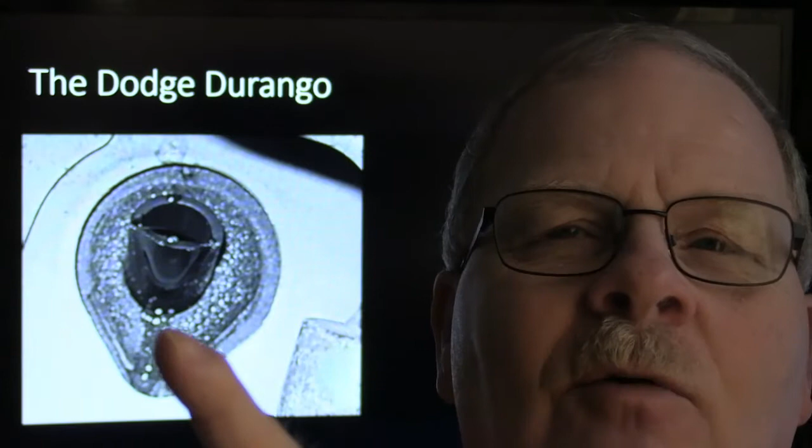But on this particular one, it was wet in the carpet. So what you do on this one is you smear a lot of silicone around here—I mean just a lot of it—and that enables it to drip and run back down that pipe, like a coffee cup. You know, when you pour your coffee, sometimes it drips.

Anyway, it was doing that, and we had seen this on a few of these Dodges. We saw it on a Caravan, we saw it on a Dodge Stratus if I remember right, and we saw it on several of them. The first one we saw it on, I think, was a Durango that belonged to one of the people who worked at the college.

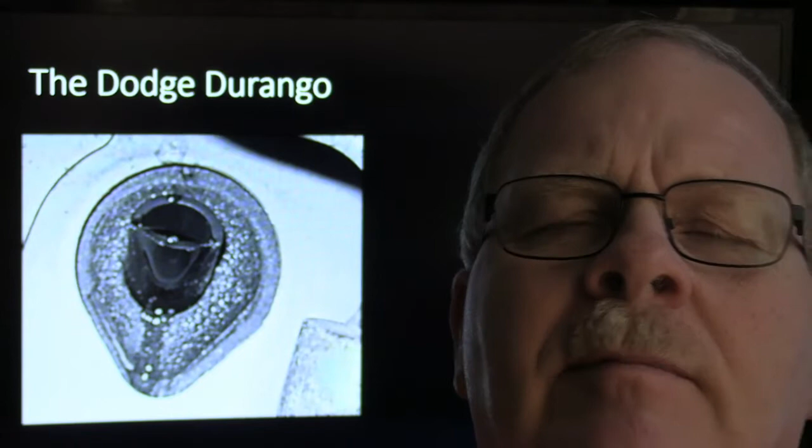This picture illustrates something almost everybody who's done serious vehicle work knows: if you put some dye in whatever's leaking, it'll help you find the leak. If you have a black light, they give you special yellow glasses, but you can actually go to Harbor Freight and buy a flashlight that's a black light. This one we'd use as fluorescent dye. You can buy a kit with the black light and all that stuff, and pay a good bit of money, but you don't have to. You can get a black light pretty cheap, like that small Harbor Freight flashlight. A lot of times you can even see the dye without the black light, but that's what we had here - it pinpointed an oil pressure sending unit that was leaking, and that's how we located it.

The students benefited greatly from that. I had also mentioned before that some people I've known would take Dr. Scholl's foot spray, that white powder, and spray everything underneath, then you'd see where the oil was coming from, because it's easy to spot when everything's painted white with that powder - the oil coming out is going to be easy to notice.

Here was an oil leak happening on a friend of mine's vehicle. He had a 2.2 liter Camry, and it was leaking from right around here. That little piece you're seeing is the oil pump, and there's an O-ring in there, sort of a triangular shape. Those O-rings on these Toyotas love to leak.

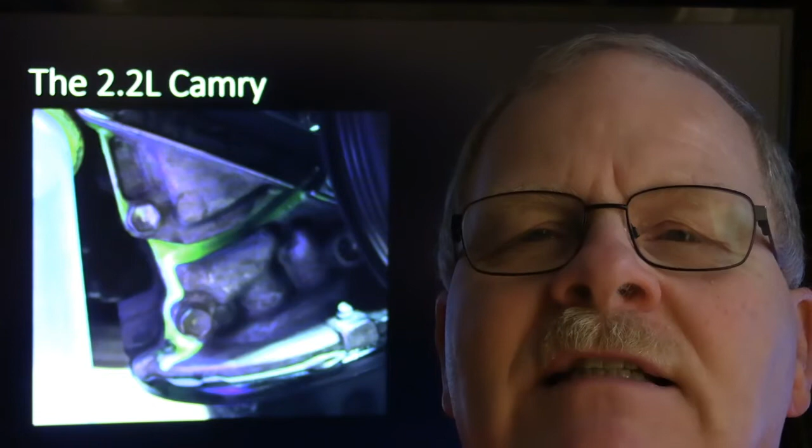That's what happened with my son. He was driving one of these vintage vehicles for a while, and he and his family drove it over here from Augusta. When they got here, you can see the pan gasket that was replaced by the shop right before he came. He had a pretty serious oil leak, so he took it in and they said, oh yeah, we've got to put a pan gasket on there. The shop charged him $400 to put a pan gasket on it.

As he drove over here, he noticed every 100 miles he'd have to stop and put a quart of oil in it. I don't remember if he thought to check it or realized it was leaking, but he had to stop and put oil in it - it was just pouring oil from under there, you could see it all over the place.

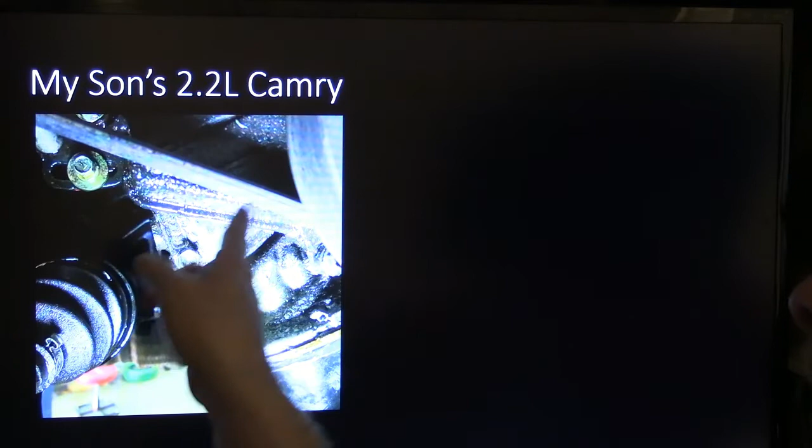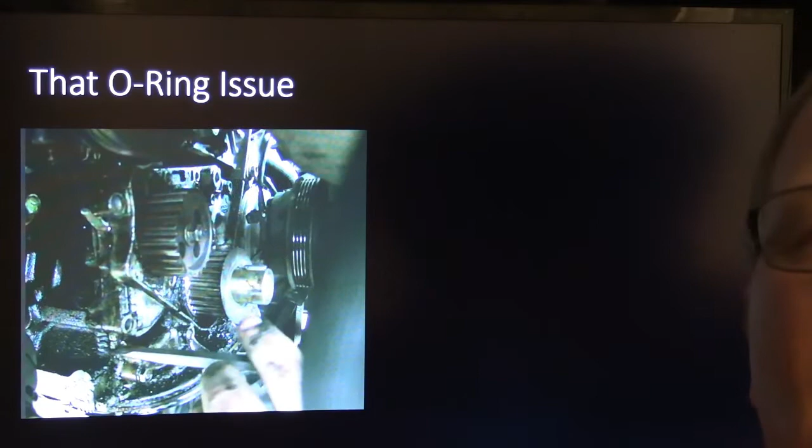This is the oil pump, the same one I showed you with the dye before, and they thought the leak was coming from here because it was running down and dripping off - that's where the pan gasket they put on there came from. There's a little video of us on that same job, that same vehicle, working the oil pump off. This sprocket drives the oil pump with a timing belt, and we'll get that off in just a minute if we keep watching.

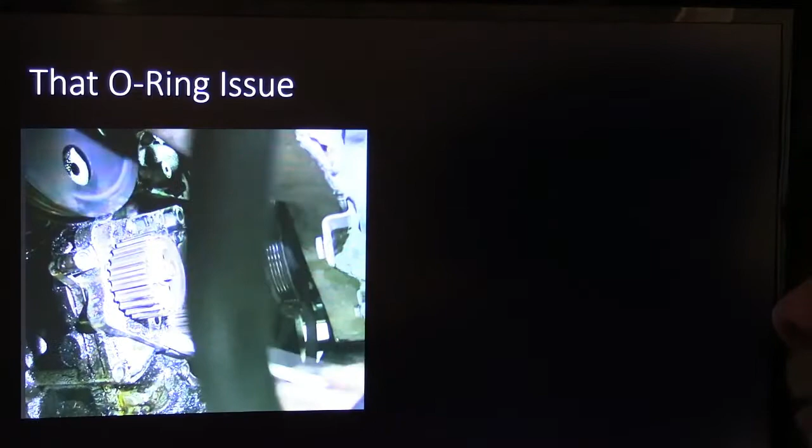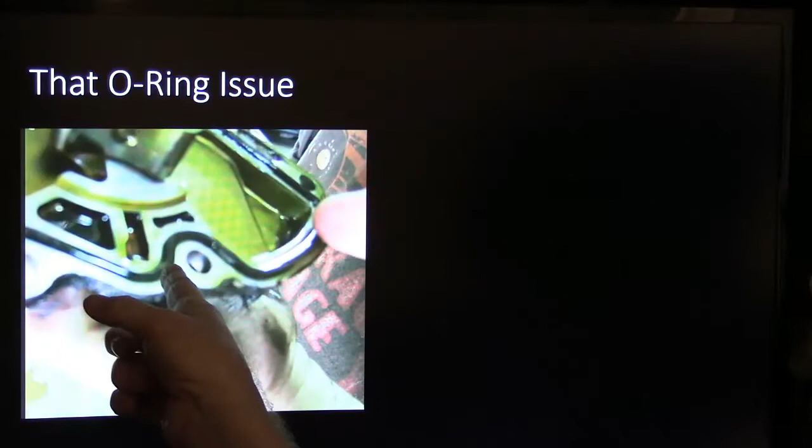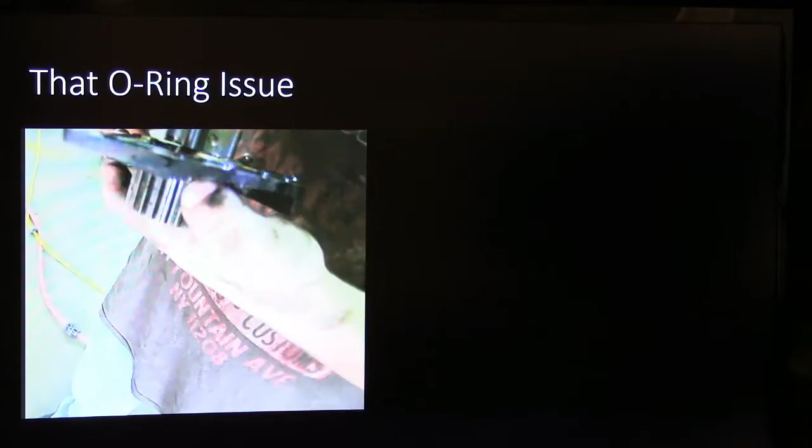And we get the oil pump off of there. There's a little O-ring that always gets really hard and leaks, and that's what was leaking on his. So we had to work that O-ring out of there and pop another one in. You can buy an oil pump O-ring for a Camry at the parts store. It ain't that hard to come up with one.

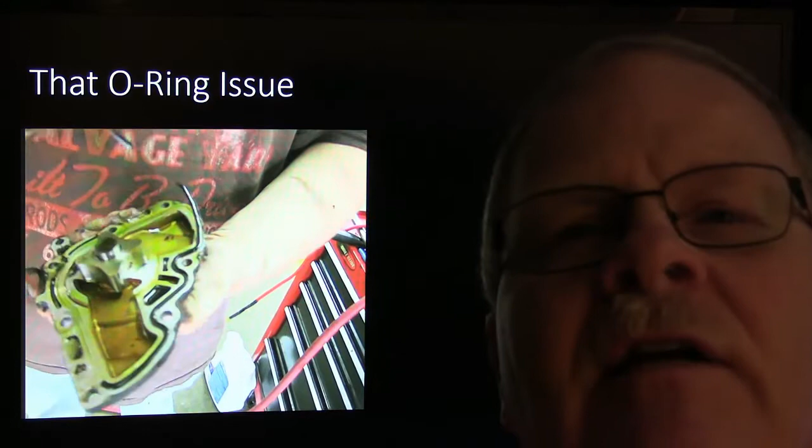But anyway, there it was. So long and short of it, that's not a very difficult job. Furthermore, the balancer on one of these 2.2s, you can just pull it off over your fingers once you pull the balancer bolt out. So anyway, there's enough of that.

And he moved it closer and closer to the door and kept lowering the price, I think hoping somebody would steal it. But I saw it laying over there, and he had like a $500 price tag on it. Nobody knew what to do with that, because it was a scope, and if it had been a scan tool, somebody probably would have bought it right offhand. But I said, I'll buy that scope from you for $300. He conferred with his boss man, came back and said, $300 it is, plus tax. So I paid him $300 on the spot and walked out of there with that scope and used it for a long time.

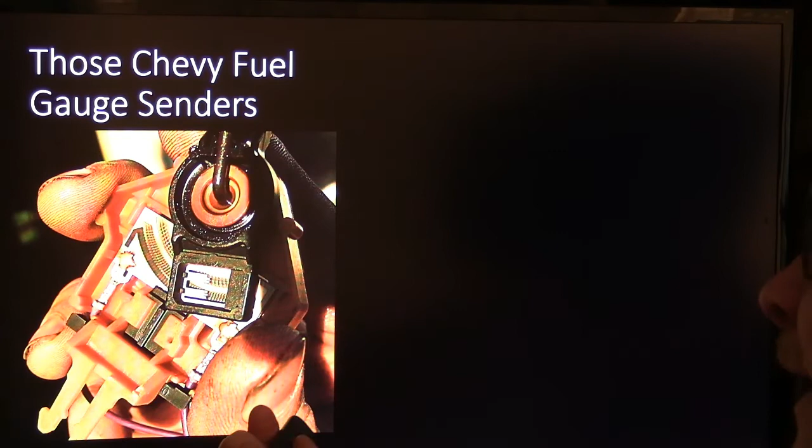If you're going to take a picture of something like this, by the way, it's really important to go ahead and hold it in the sunlight.

Sunlight's about the best light you can get on some subject matter like this. And I took that picture a pretty good while ago.

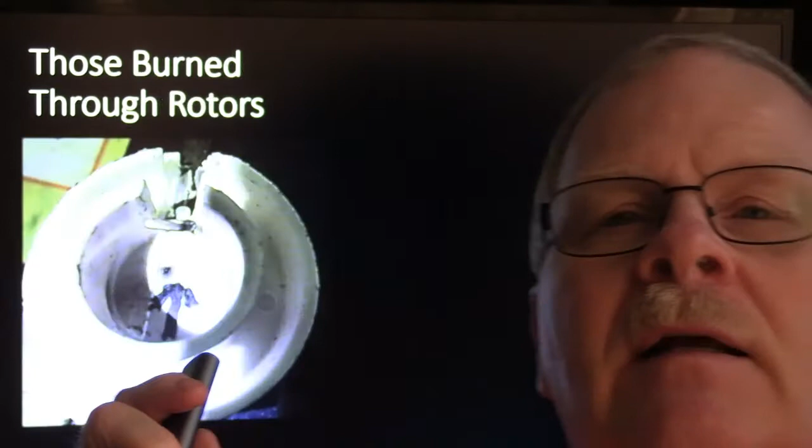Now this right here is something I've talked about before. There's shops around here I could take you to that are working on cars going all the way back into the 50s, 60s, 70s, 80s, 90s. They work on cars all the way up. So if somebody isn't used to working on a vehicle with a distributor, the rules for troubleshooting ignition with a distributor are so different from what we're used to with coil-on-plug and coil pack.

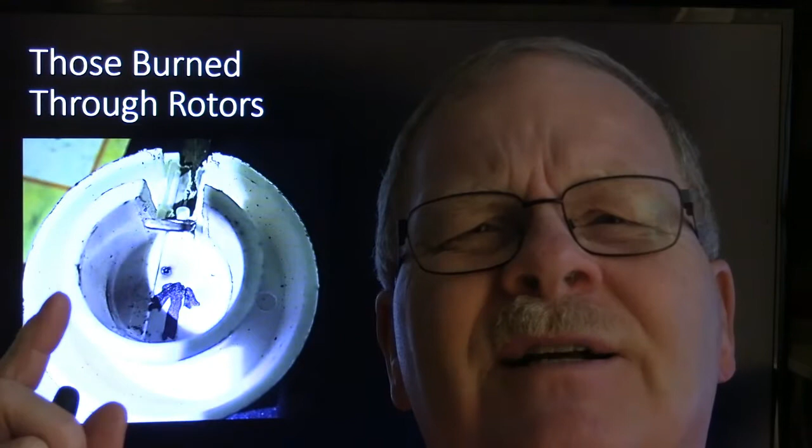This burned-through rotor right here is a perfect example of the kind of thing you're going to see on a distributor sometimes. You don't see it very often. On the old Chevys, the old HEI, when they first came out, one of the most common failures was that it would burn through that old big round rotor, and it wouldn't start. But on rotors that are like this, it would start and idle, but then when you give it the gas, it would fall on its face and quit.

But if you covered up part of the air intake and snapped the throttle, it'd rev up just fine, leading you to believe it was a fuel problem. But you'd find a burn-through rotor. And it's easy enough to check for that—you pop the distributor cap, look at it, and see what you see.

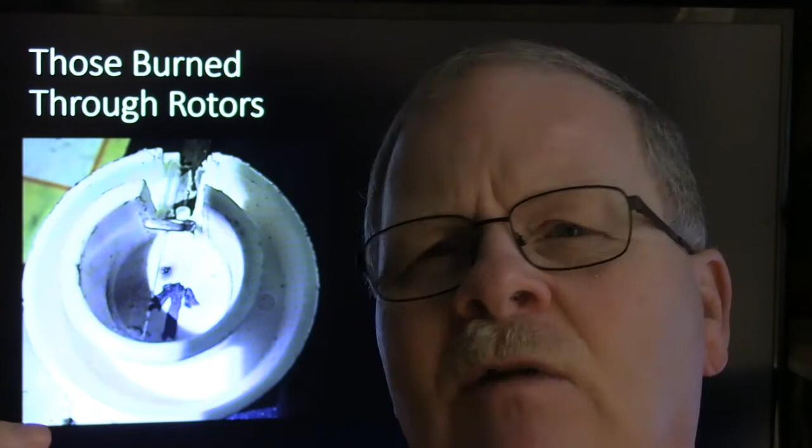So the burn-through rotor syndrome, I had seen that. The first time I saw one of those fall-on-its-face things where you cap off the air was on like a 91 Mercury Tracer. Somebody had put a rotor on there, and they had bought some cheap rotor that you had to assemble in two different pieces and put on there. It was a cheap, crummy thing, and I fought with that for a little while. Finally got it figured out.

Now, every now and then you'll have a situation where a screwdriver gets bent when somebody's using it for a pry bar. The Snap-on screwdriver says never use this for a pry bar or a chisel. Who's ever paid any attention to what it says on the handle of a Snap-on screwdriver? Unless you're a real stickler for following instructions and keeping the rules, you're going to beat on that screwdriver and use it for a pry bar if you want to. Because I may be telling the Snap-on people, this is my screwdriver, I'll treat it the way I want to.

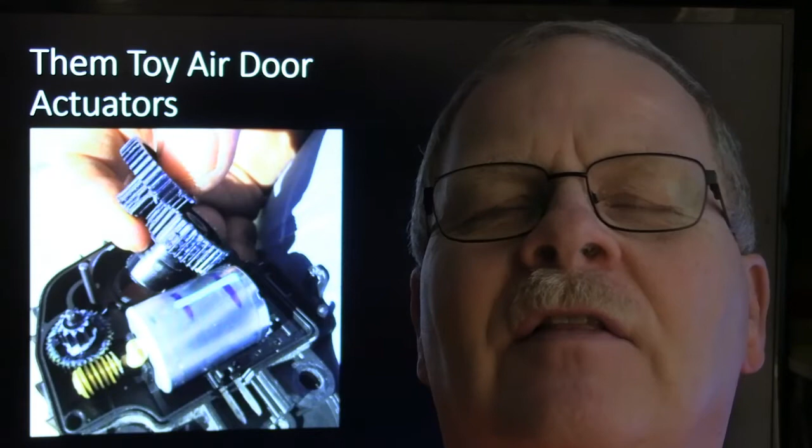So I told my mother I was going to put a camera up under her carport so she could see who was knocking on the door. She had a little black and white TV on the kitchen counter, and I put in an A/B switch along with a power-window style rocker switch. I may have used a couple of relays and push buttons, one way or another. I took one of these actuators that still had good gears in it and wired it up so the only part hooked up was the electric motor, with 2 wires going to it. I ran wires all the way out of her kitchen, around to the garage, so she could switch it to B and be looking at that video camera.

I built a little bracket with this motor and the shaft that came out of this Blend Door actuator - I think it came out of an Explorer. I had it hooked up so it would pan the camera back and forth, so she could flip from watching TV to the B setting. I used a two-sided toggle switch that was spring-loaded to the middle, and she could move that thing and the camera would pan around and show her who was out there in the carport.

I really worked hard on that. I was super, super proud of it because I put it together for almost no money - paid for a little bit of wire, but I fabricated everything else. And after 3 days of using that camera, the camera went dark. So the work I did was an absolute waste of time. My dad took the camera down and threw all that stuff away. But anyway, it was something - have you ever done something just to see if you could do it and make it work? Occasionally I'll engineer something like that.

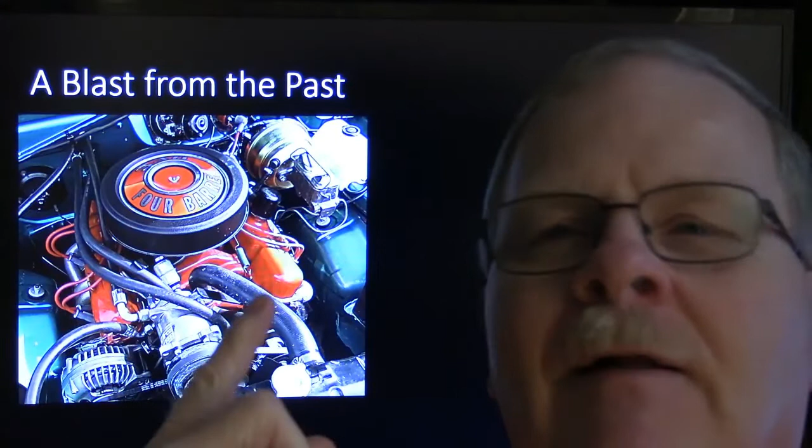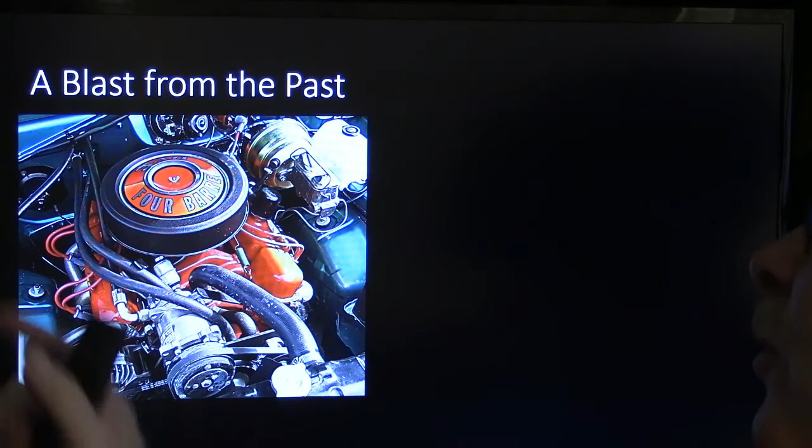Now this one here had an MSD ignition module over on the side, but it's got an upgraded air conditioner compressor you might notice somebody has put on there. But these are beautiful old cars, I love those old cars like that. And they went out of their way to make sure it looked as factory as they possibly could. This stuff right here, if you're a hobby kind of person, and somebody wants to fix up an old car, it's a labor of love to do this work yourself. If you hire somebody to do it, you're going to have $30,000 in a $15,000 car. It's not a good idea.

Something else you can do, and I learned this a long time ago, back in 1977 - I was working at a shop over here, and this guy brought a '66 Thunderbird in there, and he wanted to put an engine in it. He had like $1,500 set aside to restore that car, and the first thing he wanted was the engine put in there. I don't remember how much it cost - I think back in those days putting an engine in that car cost $600 or something like that. A lot of people have the idea that when you replace the engine in a car, it's like a new car, but that's just not the way it is. There's a whole lot of other stuff to a car besides the engine. Furthermore, I was about 20 years old in 1977, and this other guy that worked there was 26, and he was telling me, you can spend $600 on an old car like this and have a $200 car once you've put a motor in it.

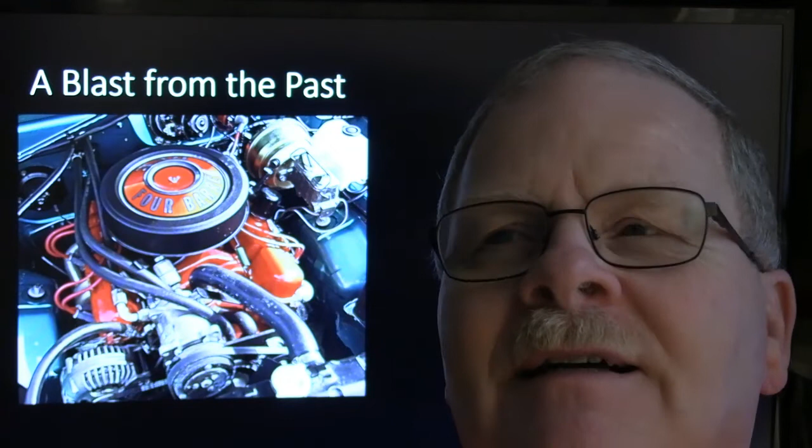So just because you put a $1,500 motor in a car doesn't mean you still don't have a $300 car. My father-in-law had an old '78 Ford one-ton truck with a heavy-duty four-speed transmission, a straight six motor in it, and he was getting ready to get rid of it back in the 90s. He told me, what do you suppose I could get for this truck? I said, well, if you sell the truck running, you're probably going to be able to get about $300 out of it. If you pull the transmission out and sell just the transmission, somebody will give you $500 for that transmission if they need one. And that's just the way it is - people will pay more for an engine than they will a truck with an engine in it, for some strange reason.

Anyway, this is the look that you have when the vehicle you worked on comes in on the hook - the one you worked on yesterday comes in on the hook. You know, you got this look on that. I don't know if anybody's ever experienced that.

Somebody that says they've never had a repeat repair or a comeback is either absolutely perfect or they're just not telling the truth. Everybody's had them come in on the hook when they could have sworn they fixed it right.

This right here is a good thing to have. I had this bucket with all these connectors in it. Every time I had to replace a wire harness, or had a chance to get my hands on a little wire harness that was being thrown away, I'd cut the connectors off and put them in the bucket. I left the dealership with it and took it to the college, and after I left the college, I left it there because I just didn't need it here at the house anymore.

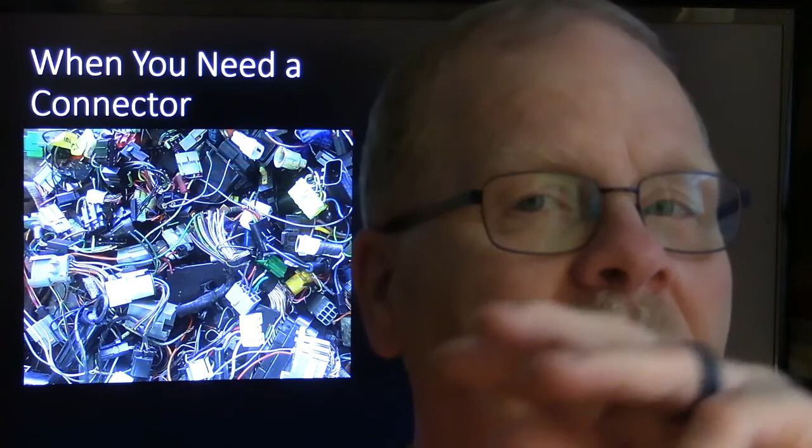You've probably seen these Delco and Motorcraft flip charts that actually have the little connector pigtails. You can say, here's the connector pigtail I need for the power window switch in my 99 GMC, and it's exactly the right one, made by Delco, and you can go ahead and buy it. They may want $90 for that one connector, but there are places where you can get connectors.

I used to get ill with the people in the parts room because they didn't want to go to the trouble to look up the connector. They would just want to sell you a whole harness because that was easier, you know. And of course a whole harness would be very expensive. A lot of the times you can't even get a harness nowadays.

I know for an absolute fact, my friend had - I told this story one time before - a 2006 Impala, he could not find a wire harness for, or it might have been a 2008. The guy that owned it had bypassed a fuse using a piece of Romex wire because he wanted the air conditioner to keep working instead of the compressor clutch blowing the fuse. He cooked the wires and just melted the harness. You know how it wires things together all throughout the harness, and you've got to split the whole harness and work on it.

For a whole day to get it straightened out. There was no wire harness available, so it was either junk the car, pay somebody for 8 hours worth of labor to split the harness, or the guy could fix it himself. Anyway, that guy wound up in a mess because he didn't realize what a fuse was for.

Anyway, this was my Jeep, yellow Jeep Cherokee, the 4-liter. I would drive that thing all the way from where I worked to the town where I live, about 30 miles. I would park at Winn-Dixie and go in there to buy some bananas. Then when I came out, whenever it would fire up, it would skip on cylinder number 3 for a little bit, and then it would clear up. It did this for a long time before I ever did anything about it.

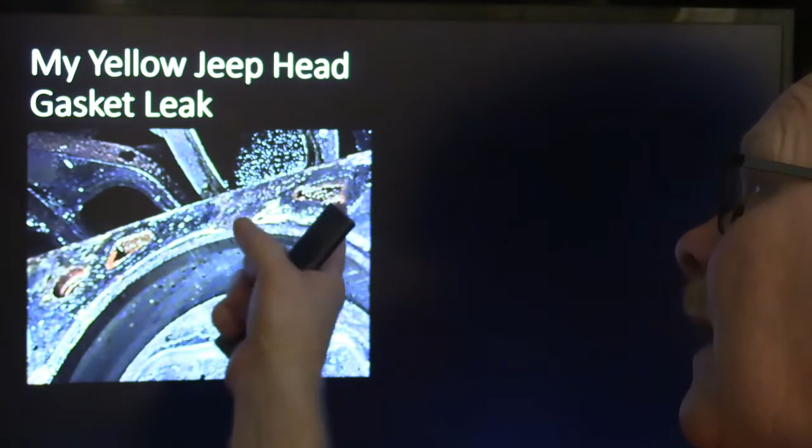Finally, whenever I pulled it - number 3 is the one that likes to breach on these - you can see right there where that thing was leaking past that fire ring. The water was coming here and going into the cylinder, and you can also see that green stuff crusted up on top of the piston, which is the residual result of antifreeze getting in there.

Anyway, I took this cylinder head to Pilcher's machine shop over here. Incidentally, somewhere I got a picture of an engine I took pictures of.

Pilcher's machine shop is one of the most astonishing places I've ever seen. You go in there and he's got these big, super powered, polished, incredibly expensive looking engines he's building from scratch. Then another time he'll be working on a big funny car with wheels about 3 feet in diameter. A few days later he's got a whole bunch of different stuff in there. He runs a lot of stuff through that shop. It's a totally amazing place. I think he calls it Pilcher Automotive. He's been around this area a long time and has an amazing machine shop.

Whenever he bores an engine, for example on an older engine, a lot of shops use a machine that bolts to the deck and bores the cylinders that way. His machine actually centers the bore on the crankshaft. In other words, the crankshaft center, where the main bearing is, he goes straight down through the middle of it instead of using the flat top of the deck to determine the straightness of the bore. He does it a different way, centering it on the center of the crankshaft.

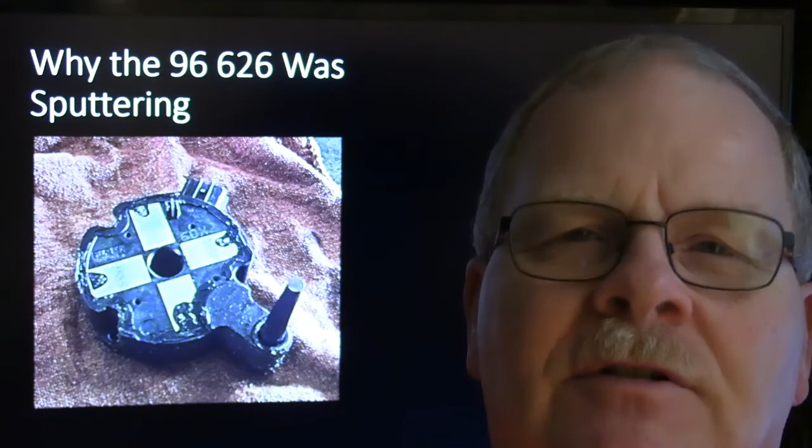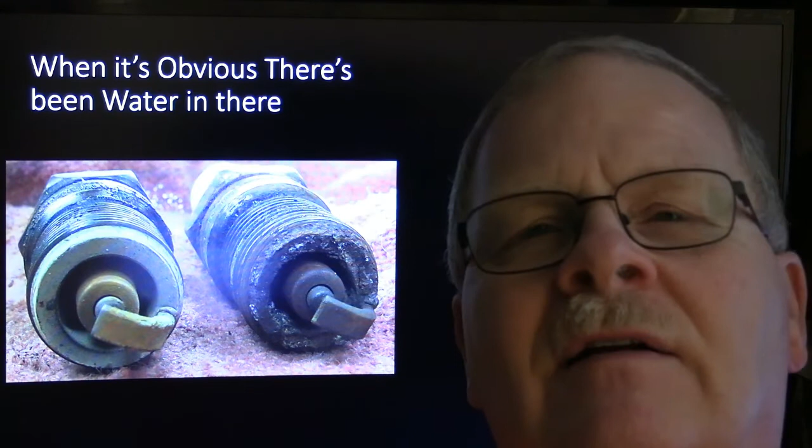You'll see it looking like that because of all that water getting in there, oxidizing, and attacking that plug.

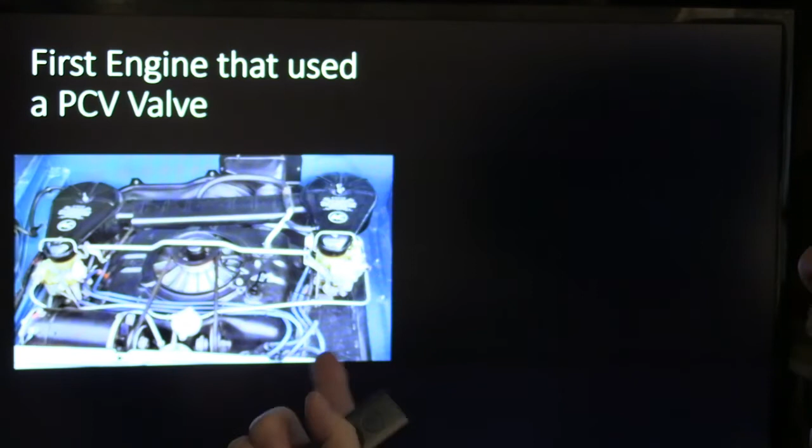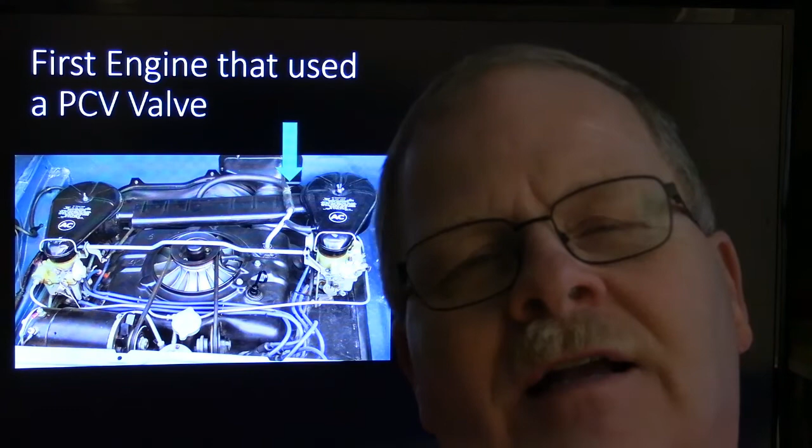This is another picture I took at the car show at our church. This was an old Corvair, and it was the first engine to use a PCV valve—I think that was in '62 or '63. The PCV valve is right here on that engine. Before that, all engines just had a draft tube cut at an angle so air would pull the crankcase pressure out as you drove down the road, dripping on the pavement and stinking up the air.

A lot of the emission controls we have are really necessary. Policemen in big cities directing traffic would have their eyes burn from the smog everywhere. It's really a good idea that we got a lot of these emission controls. Old timers didn't like it, but it's a good thing we did.

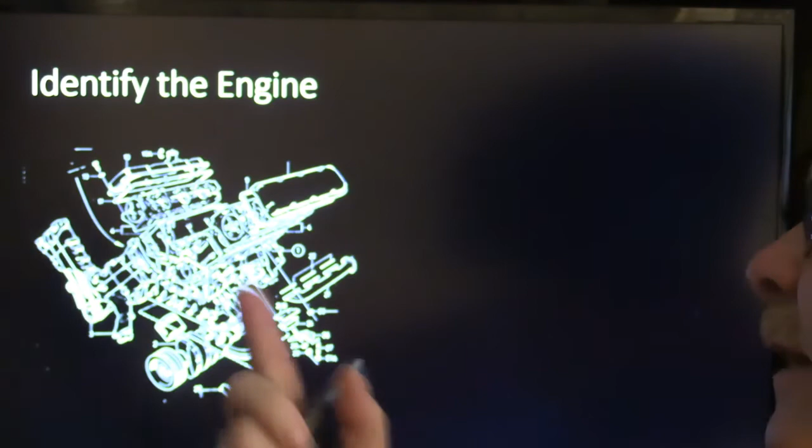Identify this engine—anybody know what this is? Have you seen one before? If you've looked under the hood of an Eagle Premier, you'll recognize an engine that looks almost exactly like this, although that one's a 3-liter and this is a 2.8. This exploded view engine—the Eagle Premier was an Americanized R25 Renault, and they all had this engine in them. This particular one here was in a DeLorean.

One day at the dealership, I walked by the general manager's office and saw this DeLorean sitting outside. He had an outside entrance, so I stepped in and asked what was going on with it. He said a guy had it in his garage for years with only 8,000 miles on it, and wanted to trade it for a new Ford pickup. He didn't know what to do. I told him he ought to trade for it, since they only made about 8,000 DeLoreans—they're really hard to come by, and one with 8,000 miles might be a good investment. So he traded the guy a pickup for it and put it in the showroom.

He kept it in the showroom for a long time and didn't drive it much—just put it there for people to ooh and ah about, because how often do you see a DeLorean? Well, my buddy decided he'd buy it from him. I don't remember what he paid—maybe $10,000 or $8,000, something like that. I don't know for sure, and honestly it's not really my business.